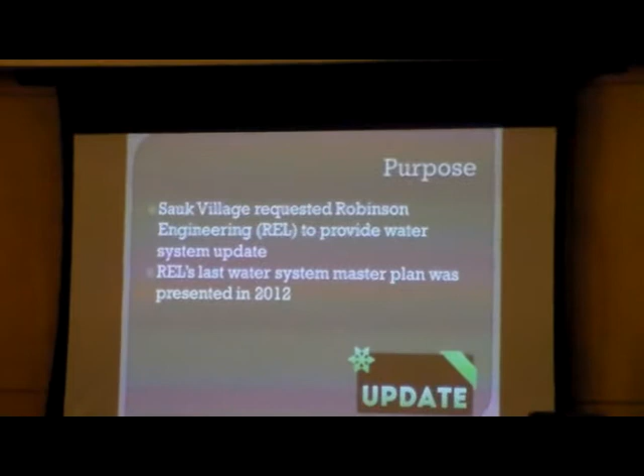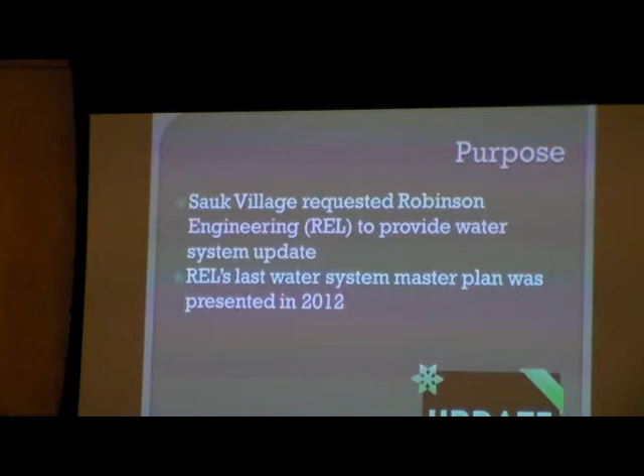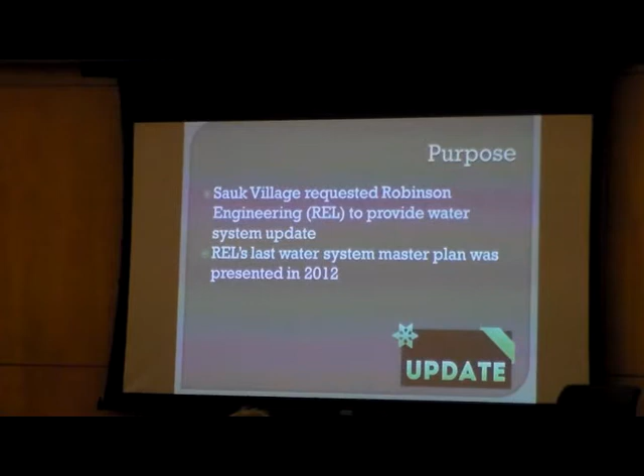Robinson Engineering was asked to present an update on the progression of the improvements to the water system, what has been accomplished, what is forthcoming, and what we recommend for the future. Our last master plan was drafted back in 2012, so it's been a few years since we've done a planning effort of this magnitude. So we figured now is the time to give you an update on where we are.

So let's talk about our progress. Back in 2011, we drafted the Water Quality Improvement Plan, and we presented three different options. The first was air stripping, which was to remove the vinyl chloride from the groundwater.

The second was to install a reverse osmosis system, in addition to the air stripping system. The quality of the water produced from that system would be equivalent to Lake Michigan water, and it would be treating the groundwater. The third option was Lake Michigan water.

The village board decided to proceed with the air stripping option and the Lake Michigan water option as two options to present in a referendum. So it was put to vote, and the residents selected Lake Michigan water.

So we did some water rate calculations and calculated that that option would require an increase to $10.37 per 1,000 gallons in order to pay for all those improvements that were necessary. So Robinson Engineering submitted a Lake Michigan water allocation application to the Illinois Department of Natural Resources.

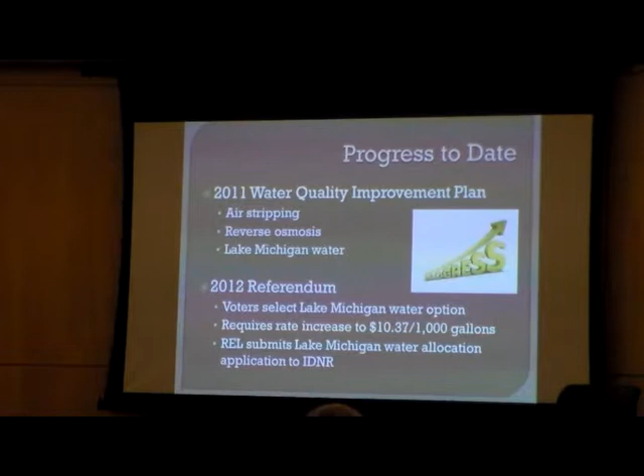The IDNR had a number of concerns, of which there were two significant ones. The first was that the IDNR allows a maximum water loss of 8% for obtaining Lake Michigan water. Historically, the village has had between 20% and 70% loss within their system -- basically the difference between what's pumped out of the ground and what's actually metered by businesses and residents in Sauk Village.

Public Works then repaired several large water main breaks in 2012, and the water loss was reduced down to 20%, which was a huge improvement. Then a leak detection survey was conducted by a private firm back in 2013. Public Works repaired some of the leaks that were found, and they're still working on others. I recently got the data for 2014, and unfortunately, taken across the entire year, we're back up to 32% water loss. Hopefully we can repair those other leaks that were located and get that number back down.

The goal is obviously to reduce the water loss down below 8%, to make the village eligible for Lake Michigan water. Another concern that the IDNR had was concerning Candlelight Village and Weatherstone Lakes.

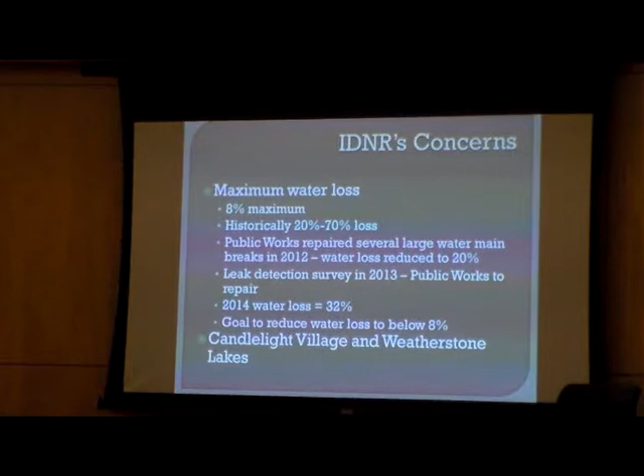So let's talk about the water system improvements. First of all, a phased approach was selected, and very wisely and prudently selected for a number of reasons. To do all the necessary improvements to the water system at once would be hugely expensive -- there's just no way the village could afford to do it all in one lump sum. Secondly, it would take a long time to do.

And thirdly, if you think back a number of years, to when the vinyl chloride first entered the groundwater, there was an urgent need to restore the water quality and quantity. With well 3 out of operation and wells 1 and 2 getting hits on vinyl chloride, the village was rapidly losing its safe water supply.

So phase 1 was the improvements to the existing water treatment plants. Phase 2 is the water distribution system repairs, replacements, and improvements. And phase 3 is Lake Michigan water. So let's go over these phases individually.

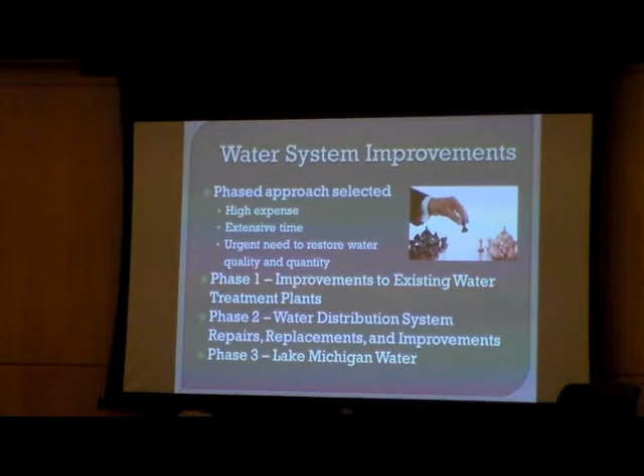First, the phase 1 water treatment plant improvements. This project is currently under construction. The water treatment plant 2 improvements are substantially complete, and well 3 is back online.

Water treatment plant 1, which is wells 1 and 2, is the current focus of the construction, and we expect this project to be completed in May of 2015. The village received an IEPA loan for $4.9 million for the project. In order to pay back this loan, the water rate was increased from $5.50 to $7.50 per 1,000 gallons.

As I'm sure you know by now, the IEPA and Governor Quinn got together and announced a grant for 100% loan forgiveness. So basically, the village doesn't even have to pay for the project.

Now, because nothing's ever easy, Governor Rauner comes into office and announces that he's putting a freeze on all the fiscal spending measures that Governor Quinn enacted. Now, according to our best information at this point, we think the forgiveness is still going to go through, for a couple reasons. One is that the loan, the grant process went forward without a hitch.

We've got our grant application into the state, so they're reviewing it now. Also, the loan forgiveness, the source of that funding is coming from the IEPA. And because of the Clean Water Initiative, that account is flush with funds, and so there is money available to allow for 100% loan forgiveness.

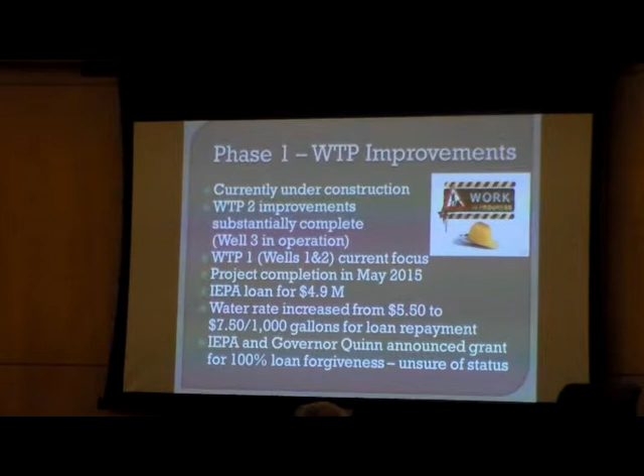There have been a number that have been out of service for quite a while. Fortunately, Public Works has been doing a great job getting a number of those back in service with replacement parts that they have on hand. So I believe the number's up to 50% been restored to service.

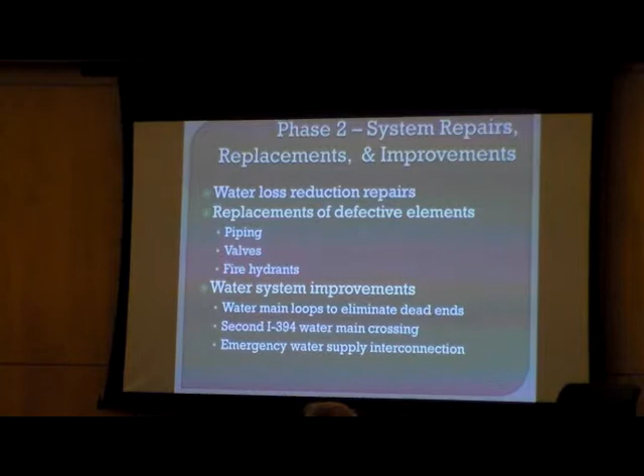So what you see here is the water atlas. And I know it's hard to see this. Hang on tight, we'll get to more detail on the next slide. But basically what we did was we developed a new plan for these phase 2 improvements that involves everything that I just announced, the dead-end water mains, elimination, etc. So what we did is we went through and proposed about 14 or 15 different improvements in the system.

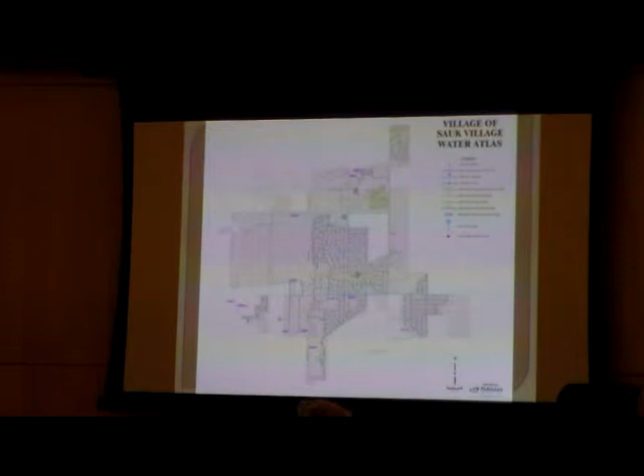In addition to replacing the remaining defective fire hydrants, and did a good job estimating the cost of what those improvements would be. So this is pretty much the dream for Sauk Village right here, in order to really provide a robust water system.

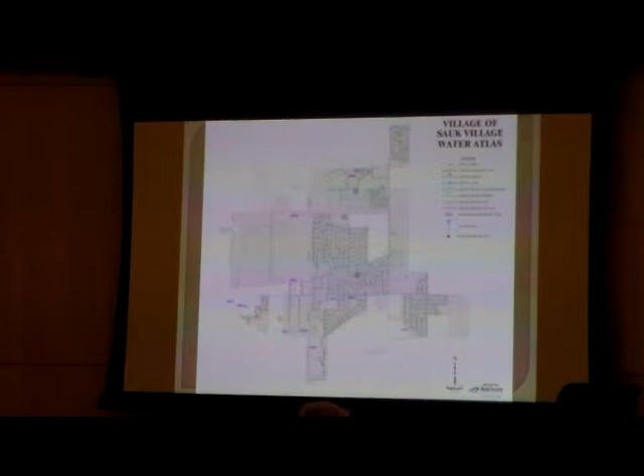So what are we talking about specifically with the improvements? So what you're looking at here is Plum Creek. And as you can see, coming down Plum Creek Drive on the left-hand side, is an 8-inch water main. And then at the very end, there's a cul-de-sac, and this is what we refer to as a dead end, because this water main is connected nowhere else in the system.

And that results in a couple problems. First is water quality. You don't get a lot of circulation in this dead end stretch because the only usage is within these lots on the cul-de-sac. So you've got a very slow flow that's coming in here. What happens is the water tends to stagnate after a while, and that's just not good for water quality.

In addition to that, in terms of reliability of delivering water, if there happens to be a water main break right here past that T connection, all these lots are without water service now, and there's really nothing we can do about it until the water main gets repaired.

So what the goal is, is to establish a water main loop. So there's a dead-end water main here. There's also a dead-end water main here that goes to Public Works.

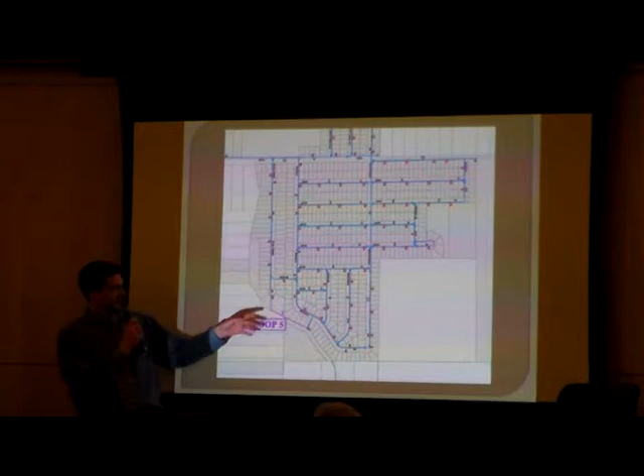So if we were to construct an 8-inch water main that connects those two segments, now we eliminate the dead end. Now we've got a lot of circulation here, because when any of these users have water demand, the water rotates around and you end that stagnation. It's very positive. Plus, if we lose this water main because of a break, that's okay—it can be backfed through this water main system. So this is an example of the improvement we're talking about to eliminate dead-end water mains.

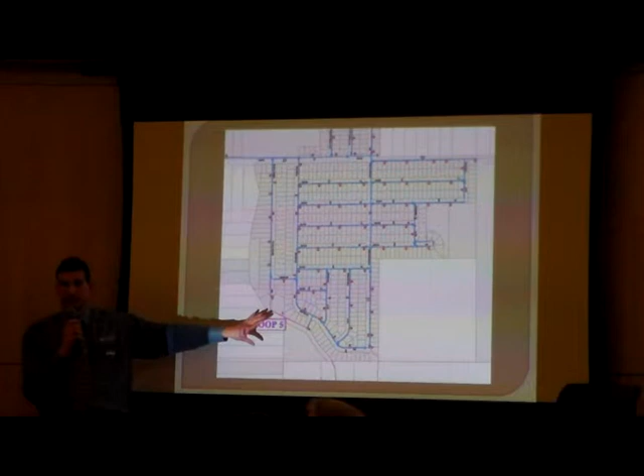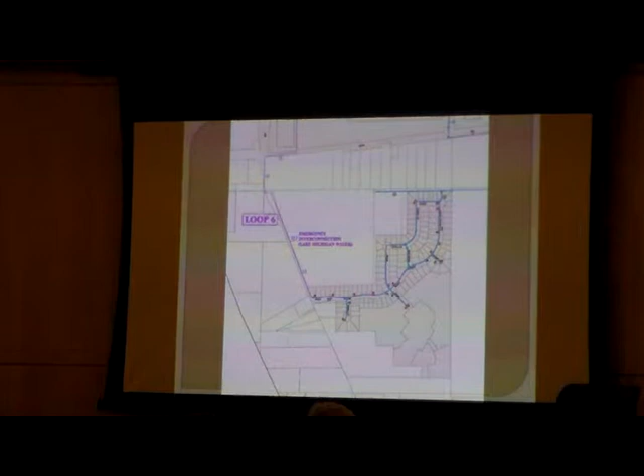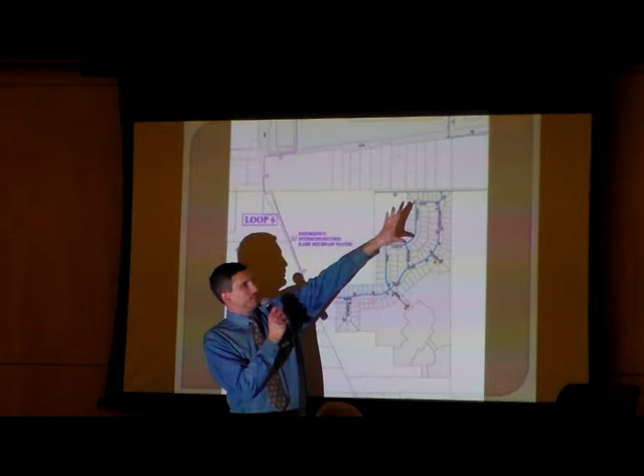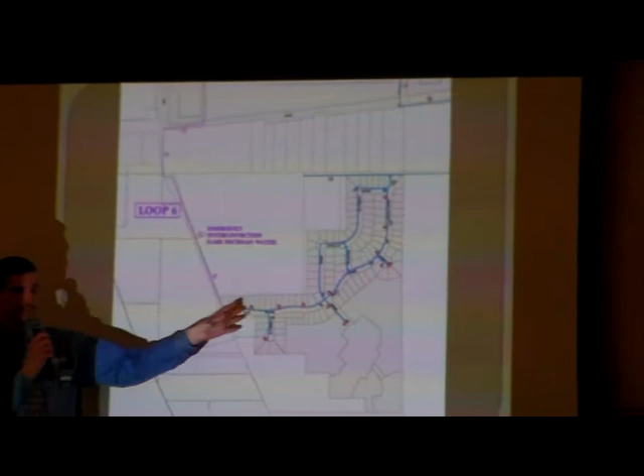Okay, now we've got several improvements that we're recommending for this area. This is Deer Creek right here, and to the north is the logistics center. The first thing we're going to do is recommend eliminating a big dead-end water main at Deer Creek, because you've got water coming in from this section of the village, and water mains that extend all the way out here but aren't connected anywhere else. So we've got those same problems with stagnation and a lack of redundancy.

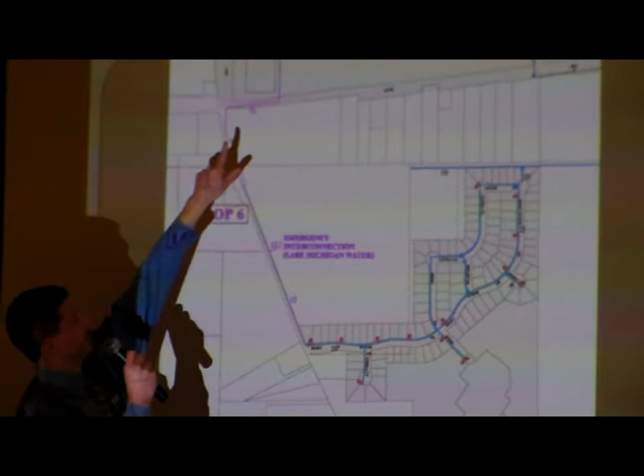So if we could build this 12-inch water main up Cottage Grove, crossing Sauk Trail and connecting to the center, then all that goes away. We've got that good circulation pattern and that redundancy. So that's huge. In addition to that, what we would recommend is an emergency interconnection to get Lake Michigan water.

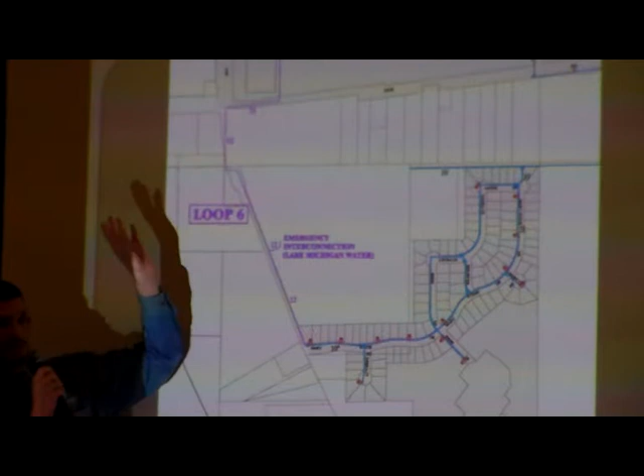As probably everybody in this audience knows already, Bloom Trail gets Lake Michigan water, and if you think back to what happened to the village just a few years ago, the vinyl chloride contamination nearly shut down every well that the village has. So the IDNR is very supportive of emergency interconnections, even with Lake Michigan water—they would absolutely recommend it.

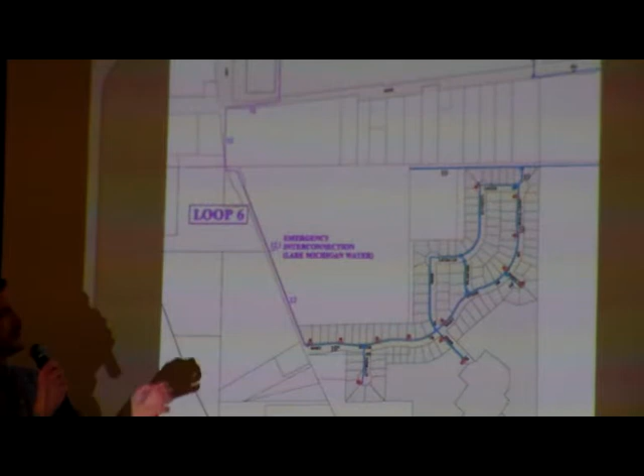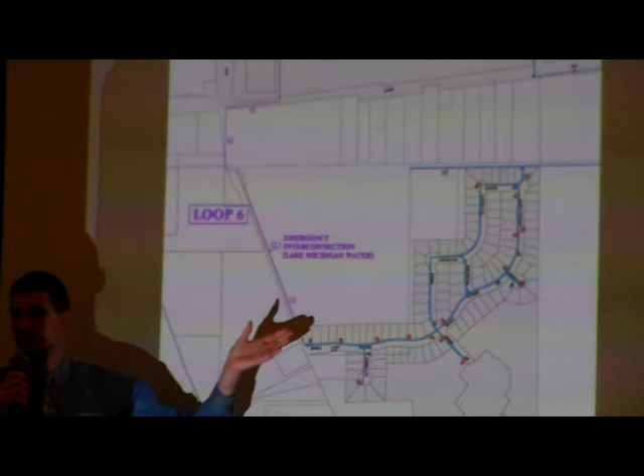So the plan would be to just build a very short section of water main here, put a flow meter on it with some valves, and connect that into the water main that supplies water from Bloom Trail and goes to South Chicago Heights down Sauk Trail. So for this relatively small improvement, the village would have a lot of reassurance moving forward that if anything like this ever happens—any contamination in the village's water supply—there's a backup water source right here.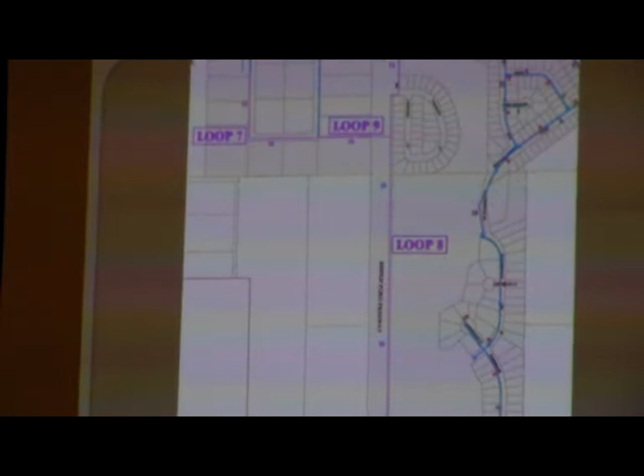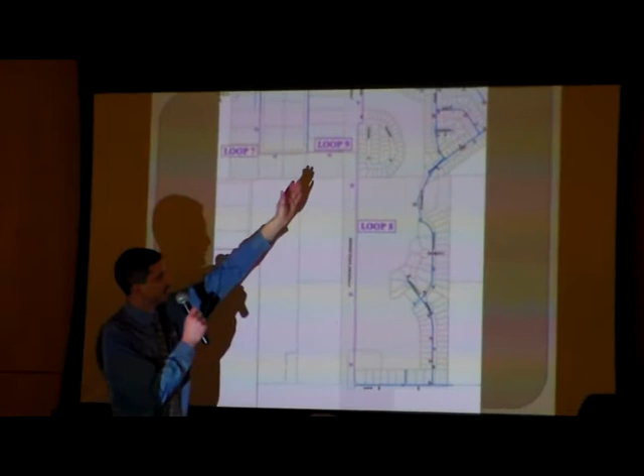Okay, and the last example is again showing multiple improvements. To get your bearings, this is Lincoln Meadows right here, this is 394, and this is Sauk Point Industrial Park. So the first improvement would be to eliminate the dead ends present in the industrial park by constructing a 16-inch water main to loop those together.

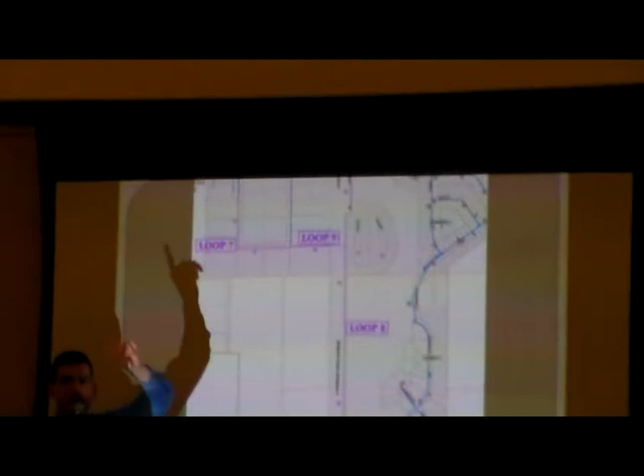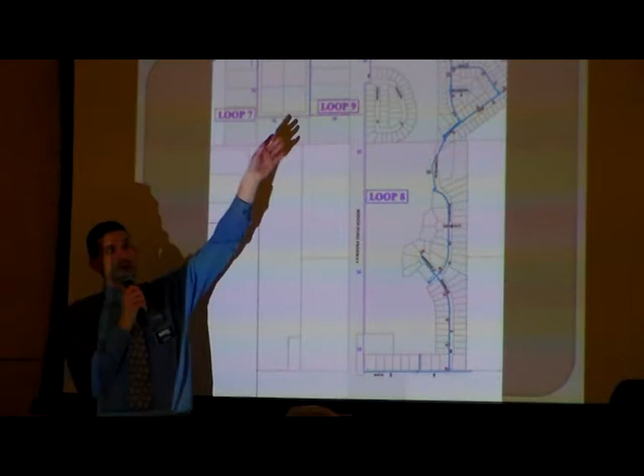We've talked about dead ends a lot already. The important part of this is another crossing of water main across 394. The village currently has one crossing, a little bit to the north of here, just south of Sauk Trail. If that water main should have a break in it and goes down, all the village's wells are on the east side of 394.

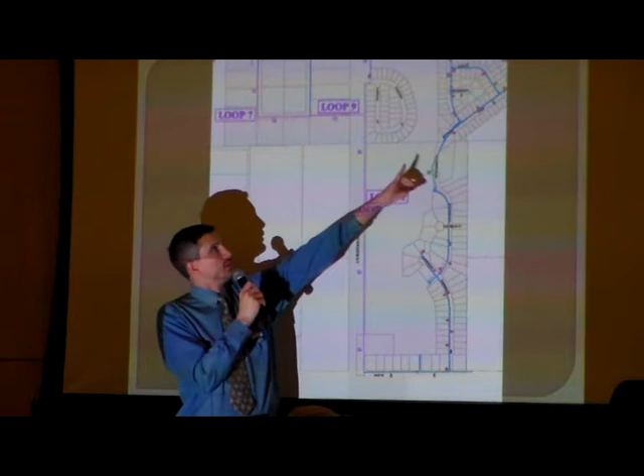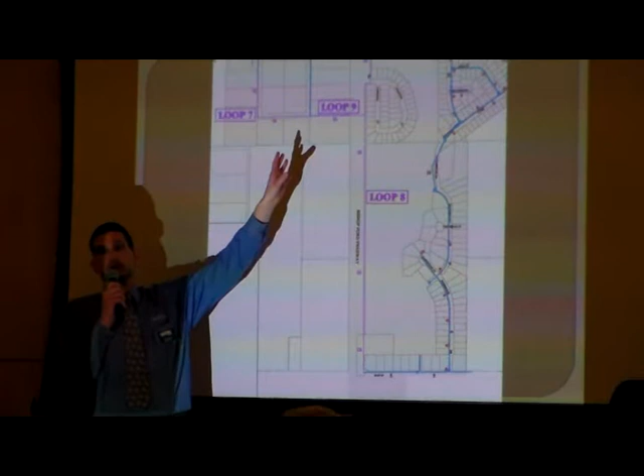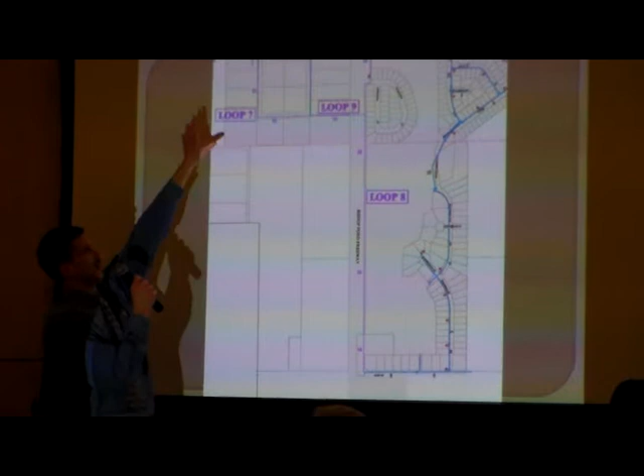There's no way to get water across 394 to the rest of the village, to the logistics center, etc. That's a bad situation. This actually happened a few years ago, and Public Works got on their horse and got it repaired. We were able to provide enough water with the west water tower right there to prevent it from being an emergency situation. But this is a big defect in the village's system.

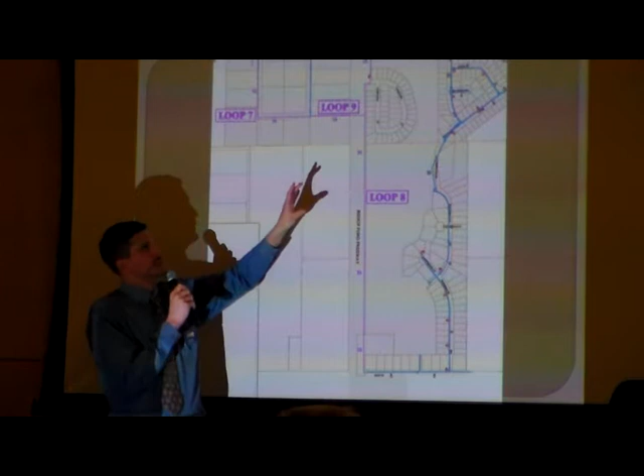So we really want another water main crossing so that if one goes down, we've got another one to supply the village.

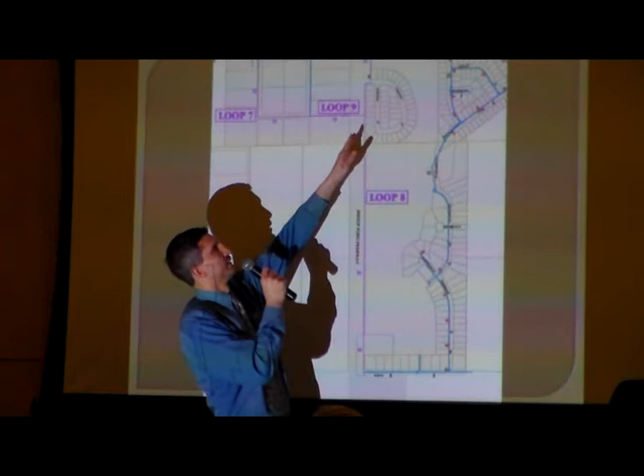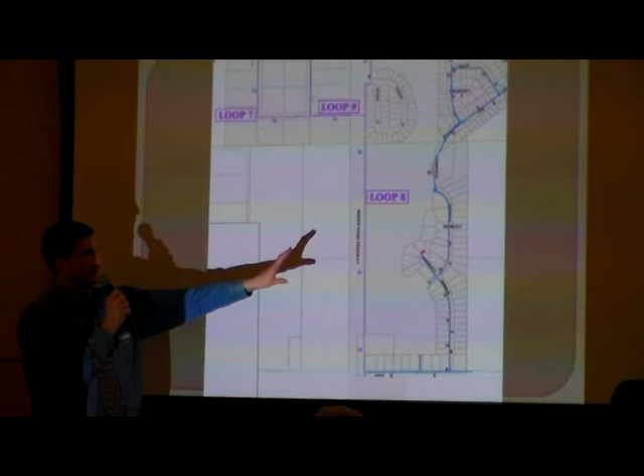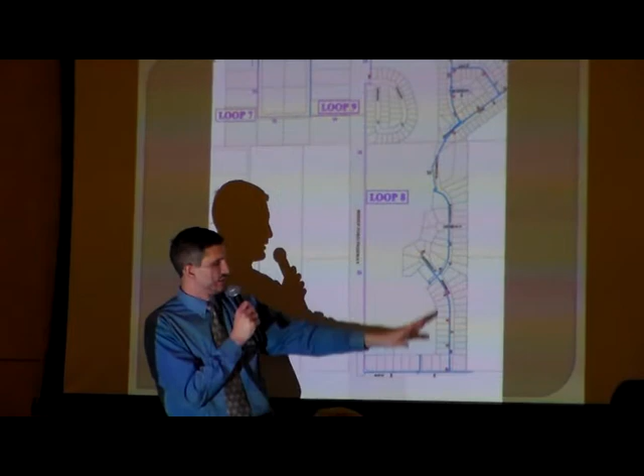After we get done with the phase 2 improvements, we move on to Lake Michigan water, which requires a water loss of less than 8%. We would submit a new application to the IDNR and negotiate water rates with suppliers, just like we did a number of years ago. Over time, those water rates continue to increase. Chicago is raising their rates, and Hammond is raising their rates in tandem with Chicago. I don't know what they'll be in a few years, we know what they are now, and we'll just see what we get when we get to that point.

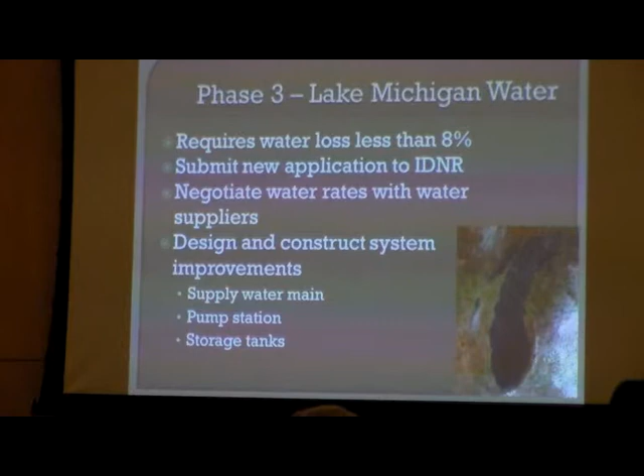After we've gone through those steps, we move on with the design and construction of the system improvements. That consists of a supply water main coming from the water main supplier, and it would also include a pump station with storage tanks. The water would come in and fill those storage tanks, then get pumped out to the rest of the system.

We estimated the water rates for the recommended improvements based on the 2012 plan, which again was a few years ago. At the time, we estimated that Lake Michigan water would cost $10.37 per thousand gallons, and that was what was included on the referendum. Subsequently, things have changed.

First, the Hammond Water Works rate has increased. Second, the water rate has increased from $3.50 to $5.50 per thousand gallons to establish a break-even status. What I mean is that the revenue the village brings in exactly equals the cost for maintaining the system and supplying water. So basically, at that point, the village is making no money, no profit - we're just paying the bills. That was calculated by an accounting firm the village hired.

Also, a leak detection survey narrowed down the scope of the system repairs. At the time, I took my best guess at the cost and magnitude of the project required to reduce the significant water loss the village had. Based on the results of the leak detection survey, it was money well spent - it's a lot less than I thought it was going to be, which lowers the cost.

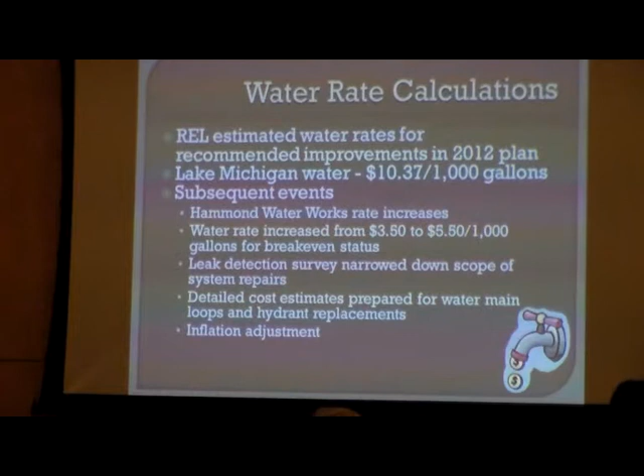Let's go through the calculations we just performed. First, for the phase 1 improvements, the water treatment plant improvements, the former water rate was $5.50 per thousand gallons. The water rate was increased to pay for the loan for the water treatment plant improvements, increased by $2, bringing it to $7.50 per thousand gallons. If the loan is forgiven, then this increase is not required - that's fantastic news here. So you've got one takeaway today: yay, there's potential savings in our water rate.

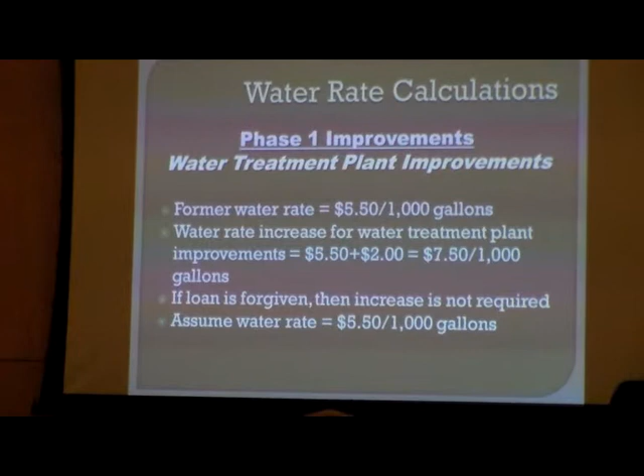Moving forward with these calculations, I'm assuming a water rate of $5.50 per thousand gallons, which is that break-even rate. For the phase 2 improvements, which include the system repairs, replacements, and improvements, the repairs are assumed covered by the current water rate. So all the good work Public Works is doing out in the system, finding those leaks and repairing them - I'm assuming everything's done on the current operating budget, even if it's not all that expensive. I'm also assuming the village would get an IEPA low interest loan to perform this project.

I estimated the water main loops and fire hydrant replacements at $5,150,000. This results in an annual loan repayment for 20 years of about $321,000. Adjusted in terms of dollars per thousand gallons, that's 88 cents per thousand gallons. The replacement cost - basically we're putting these new elements in the system, but eventually they're going to wear down and break like everything else, so we want money in the kitty to replace that when it does go down - that's 35 cents per thousand gallons.

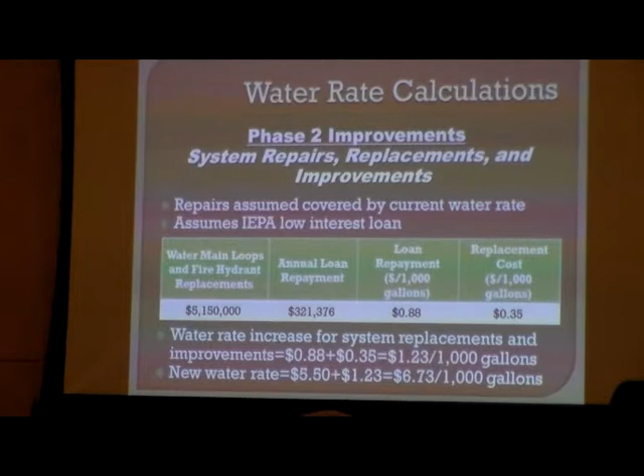So the water rate increase necessary for the system replacements and improvements is that 88 cents plus the 35 cents, which is $1.23 per thousand gallons. So the new calculated water rate to do the phase 2 improvements would be the $5.50 base rate plus the $1.23, giving you $6.73 per thousand gallons. Again, the current water rate is $7.50 per thousand, so it's a little bit less. Then getting to the phase 3 improvements for Lake Michigan water, what I'm doing is assuming that Chicago Heights is going to be the water supplier.

I'm assuming that their cost to Sauk Village today is going to be the same cost at the time that we approach them. Probably not a valid assumption, the cost will probably go up, but I gotta start with something. I'm also assuming that we're not getting an IEPA low interest loan for this, we're getting a general obligation or revenue bond. The reason for that is because the IEPA just gave Sauk Village a loan, and they just forgave the loan in order to improve the water treatment plants. So if we go to the IEPA in a couple of years and say we want to abandon everything we just built and get Lake Michigan water, I think they're going to tell us to pound sand. So if we move forward, I think we're looking at getting a bond other than an IEPA loan.

So an updated cost for the Lake Michigan water supply improvements, I estimate at $9.8 million. This gives us an annual loan repayment of $786,000, and then broken down into dollars per thousand gallons, that's $2.15. Replacement cost, we tack on another 67 cents. And then the water purchase price is $3.81. Again, that's assuming the Chicago Heights option.

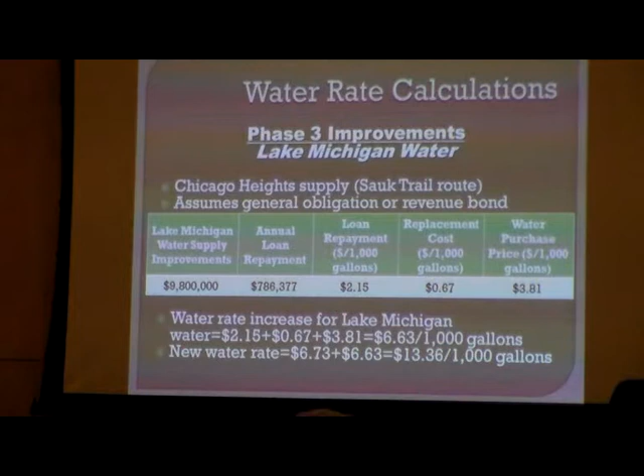So the required water rate increase for Lake Michigan water is the sum of all those, which gives you $6.63 per thousand gallons, which results in a new projected water rate of $13.36 per thousand gallons. That's adding the $6.73 we just calculated for the phase 2 improvements, plus what we'd need for the Lake Michigan water improvements. So $13.36 per thousand. Obviously a lot more than most bills are paying now.

So, a summary of the water rates. For phase 1 improvements, I'm assuming $5.50 per thousand gallons, again assuming that we get the loan forgiveness. Phase 2, $6.73 per thousand gallons, and that's 10% lower than the current water rate. And then phase 3 for Lake Michigan water, $13.36 per thousand, and that's 78% higher than the current water rate.

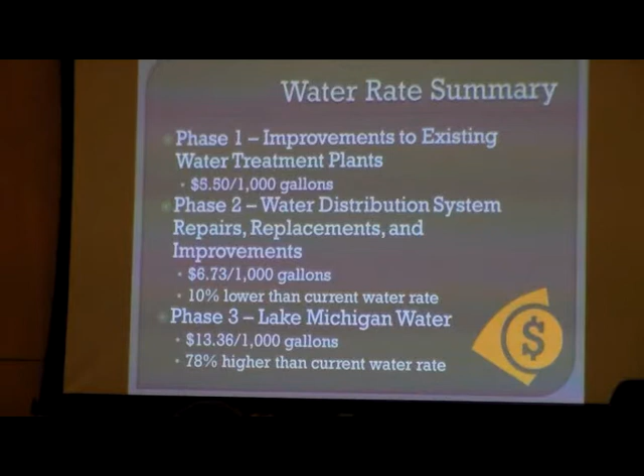So, what are we recommending? First, absolutely recommend continuing to follow the prioritized phase approach to improve the water system. Again, we can't do it all at once. The village is just not in financial condition to do that. So let's continue to prudently move forward step by step based on what the village can afford.

After the phase 1 work is completed with confirmation of loan forgiveness, then we can proceed to phase 2 improvements. Public Works should continue to repair to reduce the water loss, and that's key because the water that's pumped through the system, that's lost revenue. So the lower our water loss, the better.

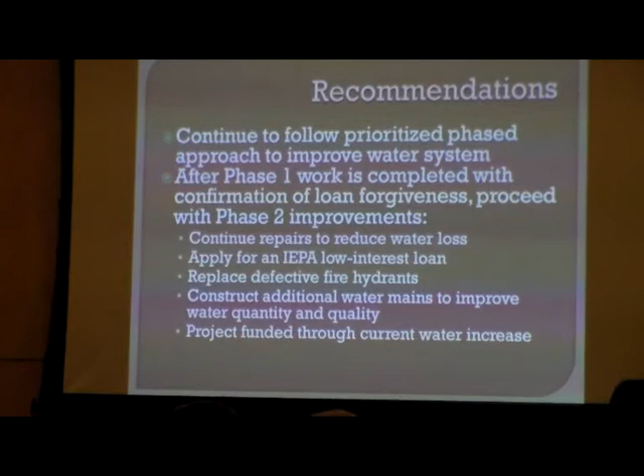Also apply for an IEPA low interest loan. So the village needs to determine how much of a chunk of those phase 2 repairs it's comfortable applying for. Replace the defective fire hydrants once the village gets the money. And then construct the additional water mains to improve the water quantity and quality. The project, according to our calculations, can be funded through the current water rate increase.

Now, we also consider adding what we call a phase 2B. Currently, there's a reactive strategy for water main repairs. What I mean by that is, a water main breaks, okay, Public Works mobilizes, gets out there, fixes it, restores the water service for everyone. Some years it's not so bad, some years it's awful. Just depends on the year.

So what we're recommending is a proactive water main replacement program. What do I mean by that? It's basically determining, okay, this section of our village, we have to repair water main there every year. It's bad, the main's old, it's just a matter of time before they go. Swiss cheese, they've been repaired so many times. It'd be more cost effective just to replace those water mains than to continue doing these emergency repairs. Plus, you're going to free up your public works staff and make their lives less stressful by responding to these emergency situations. Many of Robinson's client communities have enacted this strategy.

They've been funded through a number of different means: water fund revenue, so basically that water rate that's established, and everybody's paying their water bills, hopefully that money comes in to be dedicated to making these improvements. Also, an IEPA low interest loan can be utilized, and then finally, water bonds can be utilized. Those are, again, double the interest rate though, so they're more expensive.

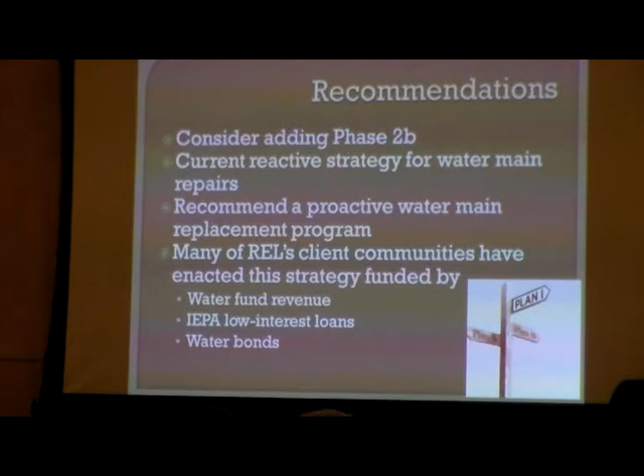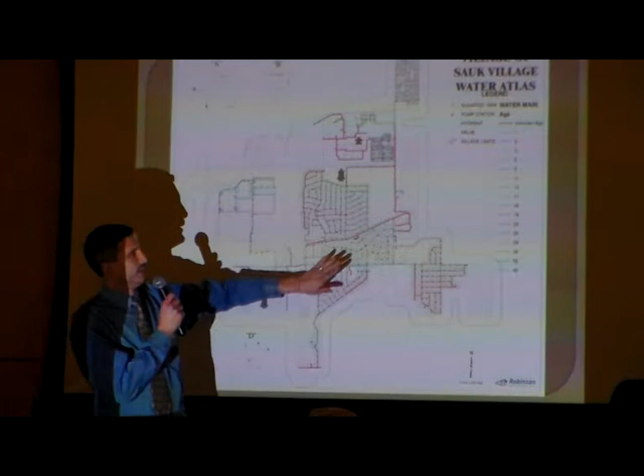So, again, don't expect you to really read this too clearly from your seats back there, but this is an exhibit that we prepared about 4 years ago. What it does is it shows all the water mains in Sauk Village. It's color-coded out to the right here to show how old the water mains are. So what I want you to take away from this exhibit is that in the heart of the village, this whole area right here, we've got water mains that are 40 to 45 years old. That's old.

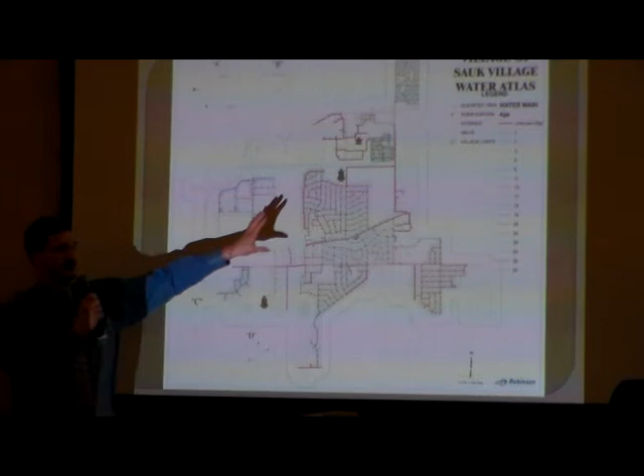Since I've been here, we've never done a water main replacement program. So the mains just get older and older and older. And like anything, mains are going to fail. Material is going to break down.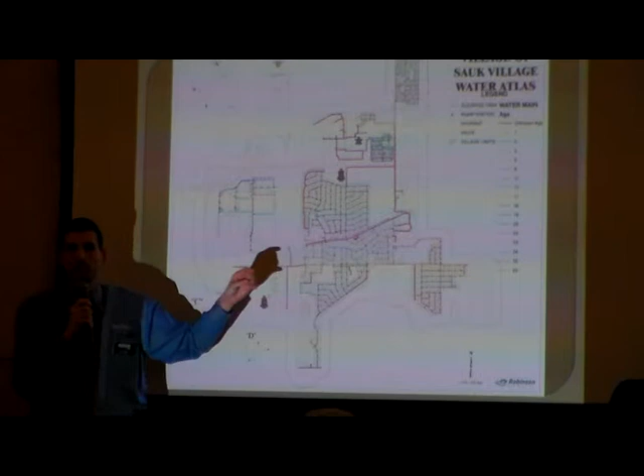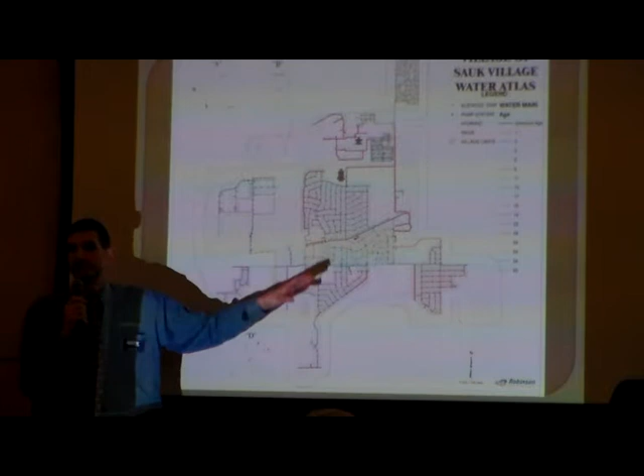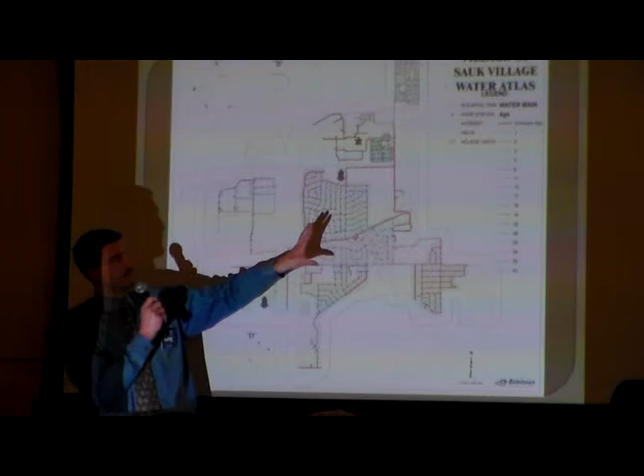The best water main pipe that you can put in the ground would be ductile iron or PVC, and those have a pretty long expected life. The best you're going to get out of those is probably 100 years. But what you've got installed here is materials that are nowhere near that quality. So you're going to get a lot of water main breaks, you're going to get main failures. It's just a matter of time.

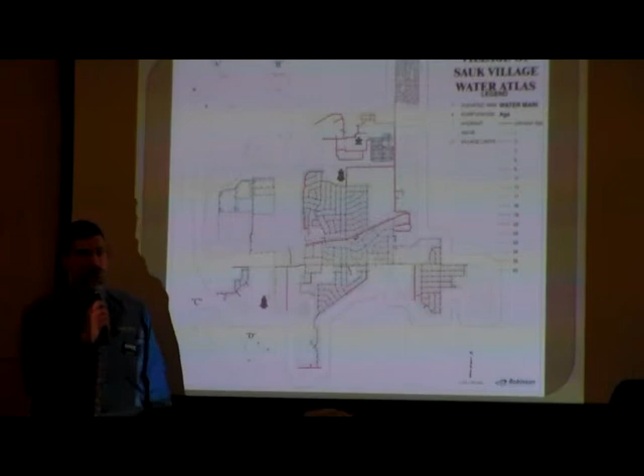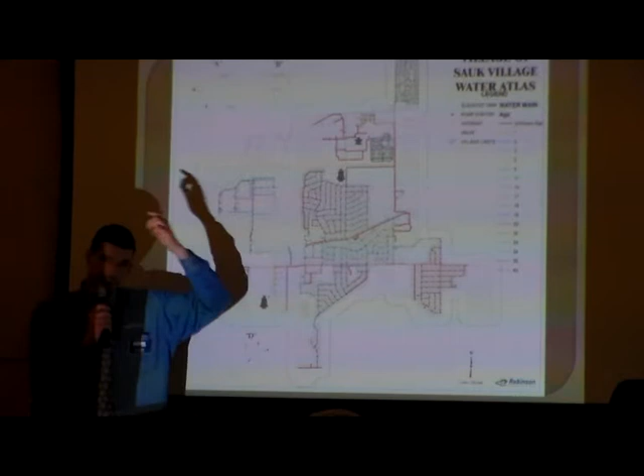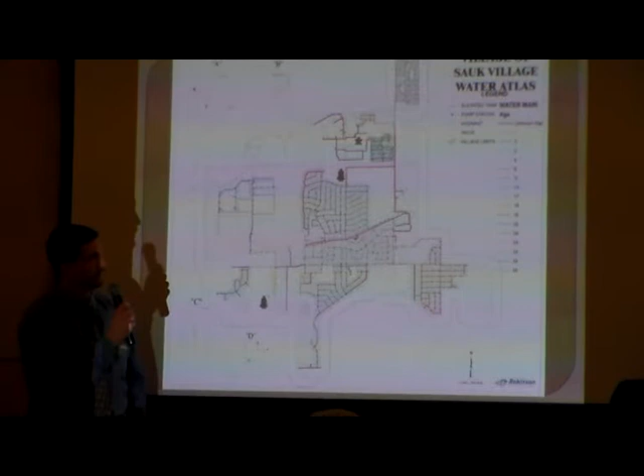So Sauk Village isn't the only one facing this. This is everywhere. Every community we deal with is experiencing this. You've got some newer sections of water main. Deer Creek, maybe 15 years. Over in Plum Creek, maybe 20 years. Just the center, fairly new. But on the whole, this whole section is 40 to 45-year-old water mains.

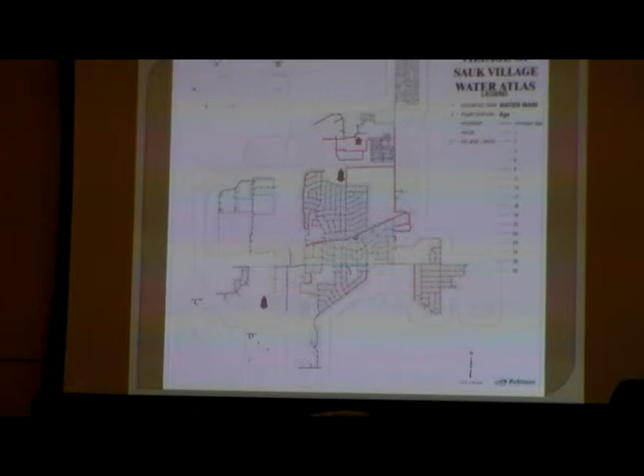So what do you do about it? What you do is you prioritize the replacement of the most defective water mains. Public Works knows where these are. I talked to Kevin, he knows where his bad sections are in the village. Those are the ones that need to be replaced first. So you attack it little by little.

Set up a plan. You say, okay, this year we're going to do 1 mile of water main repairs, and it's going to cost us $500,000. And then next year we're going to do $300,000. You go, and then you can begin to project what your results are going to be. So you're going to gradually renew your aging water system infrastructure. If you just ignore it and let it go, eventually it's going to fail, and it's going to cost you 4 times as much to fix rather than if you just do it up front. So it's the smart way to improve your system, and like I said before, you get a reduction of your emergency water main repairs.

And this doesn't just include water main. It includes valves, there are a number of defective valves out there, leaking valves. You've got hydrants, we talked about those already, that is key, you've got to get those replaced. Water meters, fortunately for Sauk Village, your water meters are relatively new, so we're talking somewhere between 5 and 15 years old. Those have been recently calibrated, no problem with those. But think ahead, 10, 20 years from now you're going to have old water meters that need to be replaced, like they were replaced 5 to 10 years ago.

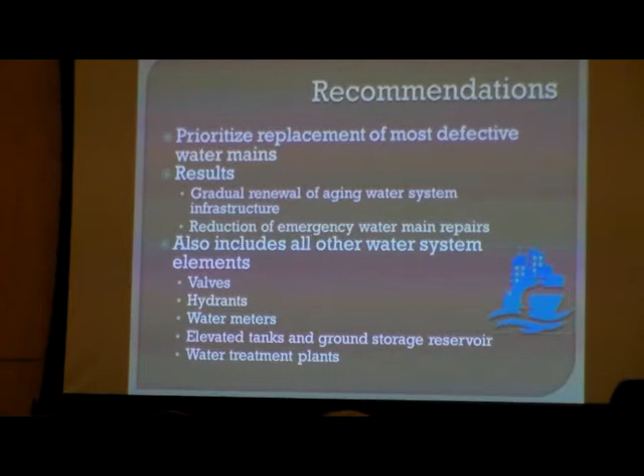Continuing on, after completion of phase 2, proceed to phase 3 for Lake Michigan water. So contact those Lake Michigan water suppliers for updated purchase prices. Like I mentioned before, Hammond Water Works is expected to increase their rates in tandem with Chicago.

Then complete a new rate analysis to update the required water rate. I'm calculating it at $13 or so a thousand today. 5 years from now, 10 years from now, when you're ready for lake water, it's going to be a different cost. Then submit an allocation application to the IDNR, and make sure that we coordinate with Candlelight Village and Weatherstone Lakes to make sure that they also submit applications so that the process can go smoothly and we can get approval for that allocation.

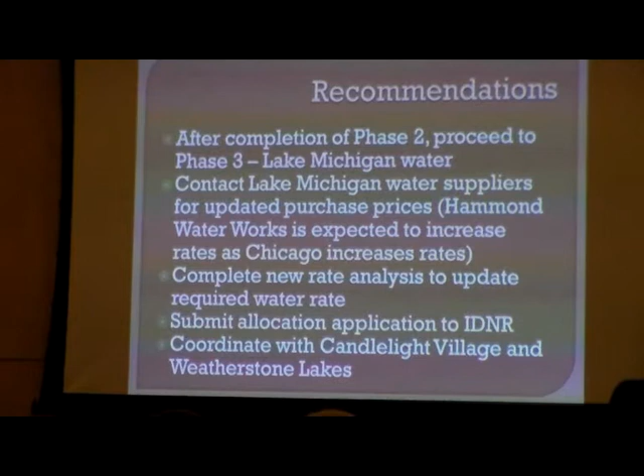Okay, so that's everything I've got. So my understanding is... does the board have any questions?

I do have one, I was writing it down. You answered most of them. I just wanted to know the estimated time set for phase 2 to complete.

If you do it all in one big chunk, that's a large project. I would say the IFA loan process, probably 2.5 to 3 years.